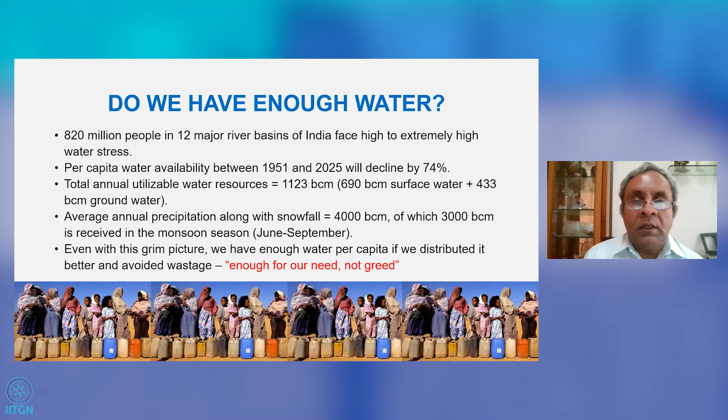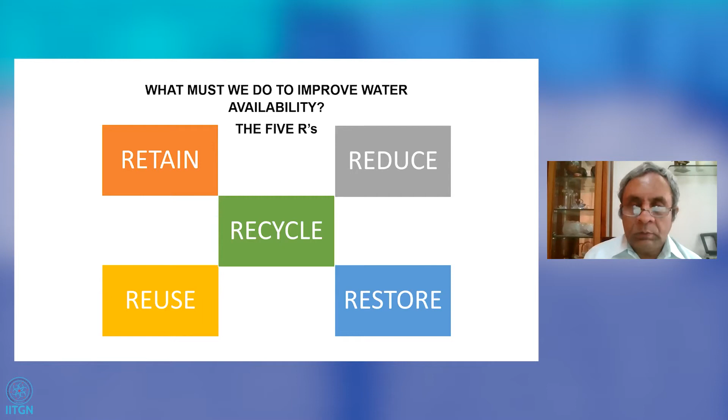What must we do to improve water availability? I look at it as the 5 R's: retain, reduce, restore, reuse, recycle. To start with, let's look at retain.

India has a very long history, 5,000 years of water management. The reservoir in Dholavira in Gujarat was set up between 3000 and 1800 BCE. This was one of the locations of the famous Indus Valley civilization, which stretched across much of West India and what is today Pakistan.

Sringaverapura near Allahabad was a location where Ganga floodwater harvesting was done 2,300 years ago. The Kallanai Grand Anicut on the Kaveri River, built by the Cholas 2,200 years ago, is still in use.

Over the last several decades, almost 100 years, we've built a large number of dams, reservoirs, and water storage systems, including Hirakud Dam on the Mahanadi, Nagarjuna Sagar Dam on the Krishna, Bhakra Nangal on the Sutlej, Tehri on the Bhagirathi, and Sardar Sarovar Dam on the Narmada.

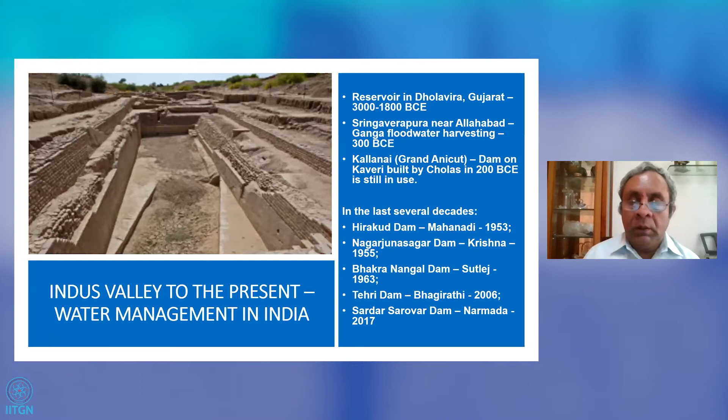But though we have been using these dams and impounding water in large reservoirs, we still face serious problems in going along this path. Why? Because dams are increasingly associated with displacement of local populations, deforestation, environmental degradation, and geological activity.

It's not popular anymore to be building dams. There's a lot of opposition, and it's unlikely that we will easily be able to convince the populations in those areas, particularly local and tribal populations, that it is necessary to do such violent damage to nature in order to build huge dams. In addition, river flows are also decreasing due to demand and climate change.

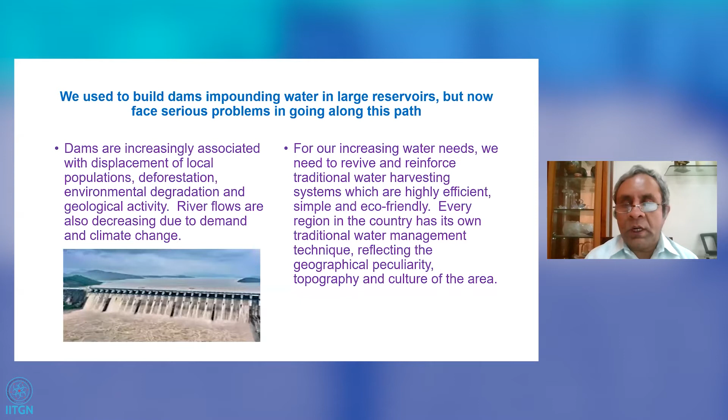So for our increasing water needs, we need to revive and reinforce traditional water harvesting systems, which are highly efficient, simple, and eco-friendly. It's interesting to note that every region in the country has its own traditional water management technique, reflecting the geographical peculiarity, topography, and culture of the area.

I'll run through some of these very quickly. The Kuhls are surface water channels in Himachal Pradesh. They carry water from the streams for irrigation.

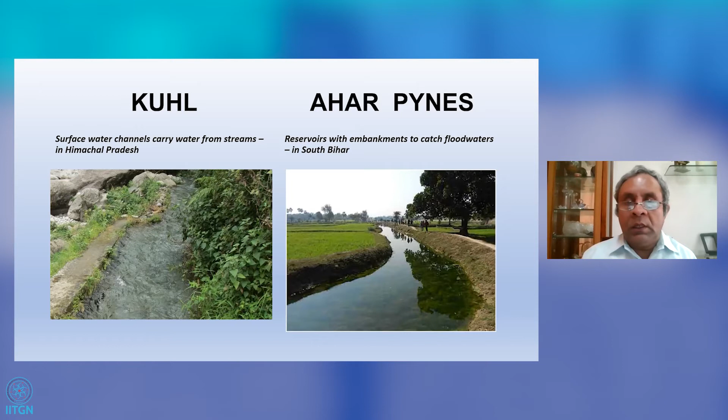Ahar pynes in South Bihar are reservoirs with embankments which catch the flow of flood water, used for paddy cultivation in Bihar.

The Khadins are earthen embankments built across hill slopes in Rajasthan. The Zabo of Nagaland are channels which carry rainwater from hilltops.

The interesting thing is that this rainwater is channeled through cattle yards, where it picks up manure and moves on to ponds on terraced hillsides, and from there to paddy fields. In these paddy fields, it's not only paddy which is grown, but fish is also being cultured. As a result, the manure helps feed the fish as well as grow the crop.

Check dams have been a very good way in which small interventions can manage to bring great results. They're called Johads in Rajasthan, Madaka in Karnataka, and Pemghara in Odisha.

The Johads in Alwar district have been remarkable, through the Tarun Bharat Sangh of Rajendra Singh, in bringing about tremendous change in raising groundwater levels and changing the whole water situation in Alwar district and neighboring districts.

The Bhandara in Maharashtra, in Nasik and Dhule districts, diverts water to the Phad, which is a community irrigation system on three rivers of the Tapi system. This again has been very beneficial to the cultivators in the area.

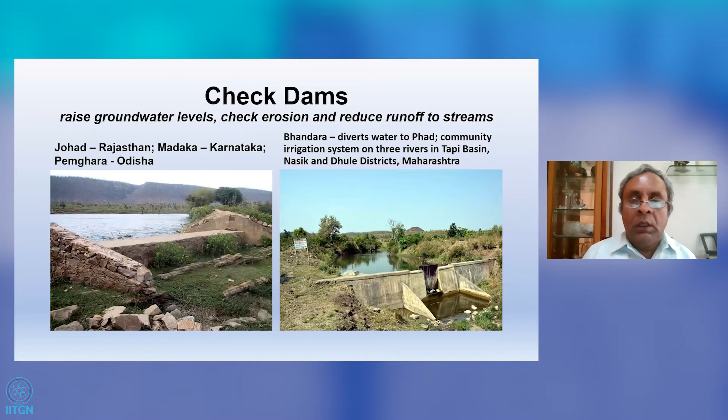Impounding water has always been an important factor in making sure we have enough for drinking water as well as agriculture. The pat and katta are bunds of stone and mud, seen in Madhya Pradesh and also in coastal areas. They hold water for irrigation and minimize the flow of fresh water to the sea.

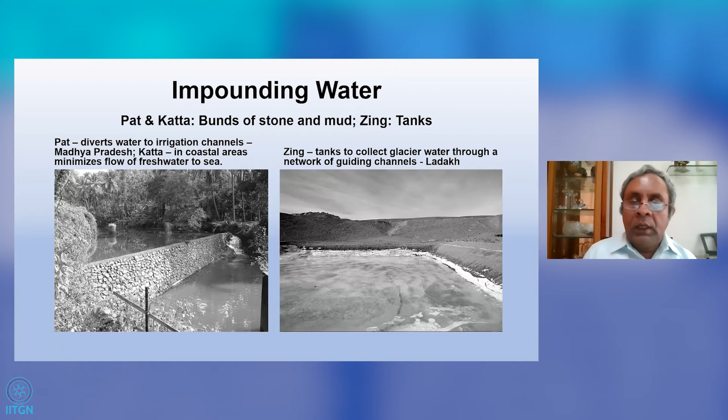Zings in Ladakh collect glacier water through a network of guiding channels, enabling farming to be done in an area which otherwise has very little water.

Tanks and percolation wells in Rajasthan are critical for drinking water. In particular, the Tanka is a system of rainwater harvesting through cylindrical pits in Rajasthan. The Par enables rainwater from catchments to percolate the sandy soil, and these kuis are used to get the water from below, which has sunk into the soil. The number of kuis can depend on the size of the Par.

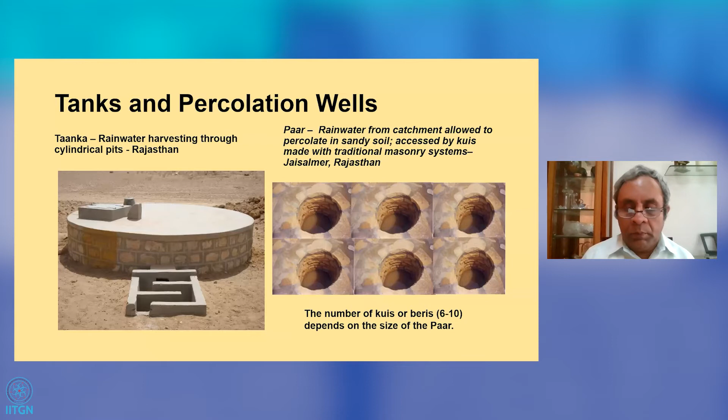We have water harvesting structures all across India: the big tanks, the Eri in Tamil Nadu, the Cheravu in Andhra Pradesh, the Dong in Assam. These are flood control systems. They also check soil erosion, prevent wastage of runoff, and recharge groundwater. In many cases, these tanks are interconnected, so they manage to move and distribute water from places of surfeit to places of deficit, ensuring distribution in addition to storage.

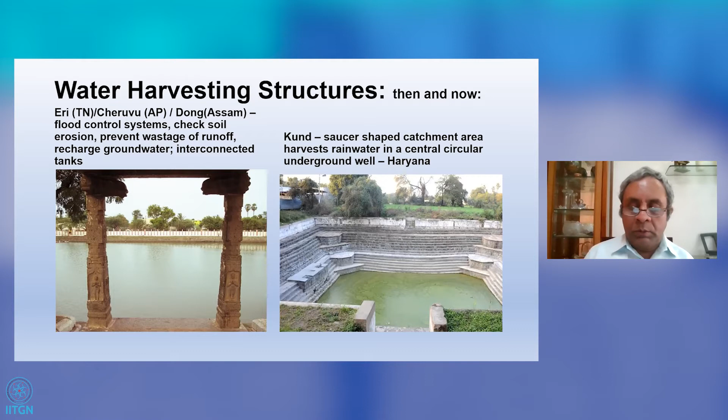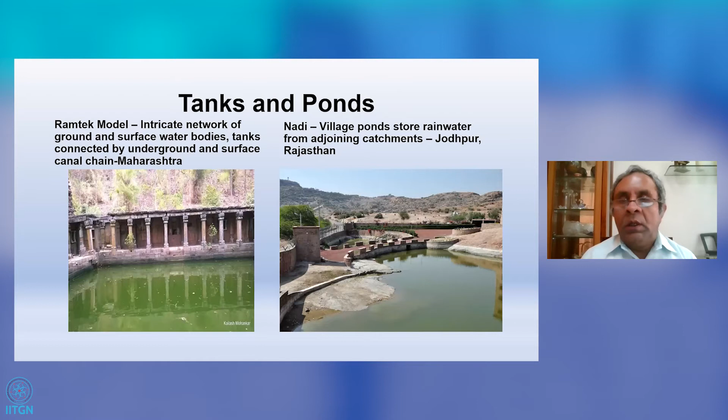The kunds in Haryana are saucer-shaped catchments which harvest water in a central circular underground well. Kunds are also found in other parts of North India, and they are extremely useful both for drinking water and irrigation purposes. Tanks and ponds across Maharashtra include the Ramtek model, an intricate network of ground and surface water bodies connected by underground and surface canal chains. The Nadi in Rajasthan, which also means river, refers to village ponds which store rainwater from adjoining catchments in Jodhpur.

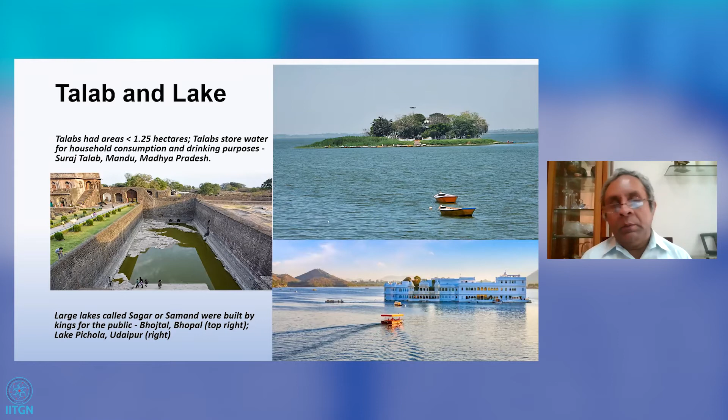Talab and lake, the designation of Talab, Sagar, Samand, lake, all depend on the acreage of the surface water body. The small one acreage is the Talab - you see here the Suraj Talab in Mandu, Madhya Pradesh. We also have the large lakes, the Sagar and Samand, built by kings for the public - the Bhojtal in Bhopal on the top right screen, and Lake Pichola in Udaipur on the right bottom.

A unique feature found in Gujarat, Rajasthan, even Karnataka are stepwells. These are tremendous improvisations for a time when we never had pumps or electricity systems to lift water easily. By tapering it and enabling people to go down to the water, they managed to ensure that the water table stayed at a position where it could be reached by people who could then carry the water up.

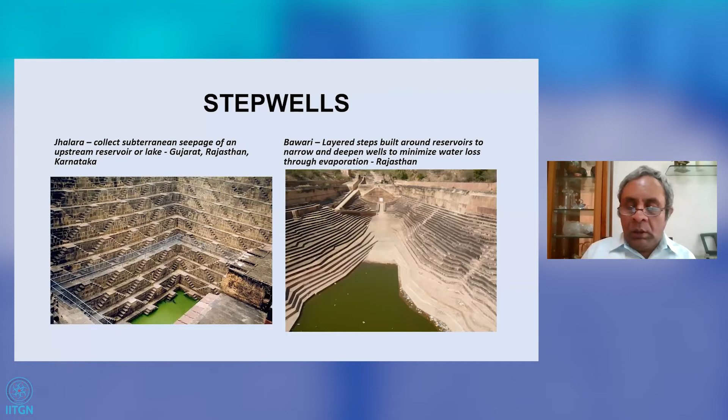The Bawari has a similar arrangement - the Jhalara in Rajasthan on the left, and the Bawari also in Rajasthan. The Bawaris were built very narrowly so that they could deepen the wells and minimize the water lost through evaporation. Other water storage structures, the Baolis, had beautiful arches, carved motifs, sometimes even rooms, and even stages for dance performances in Firozshah Kotla, New Delhi, in Gujarat, and in Rajasthan.

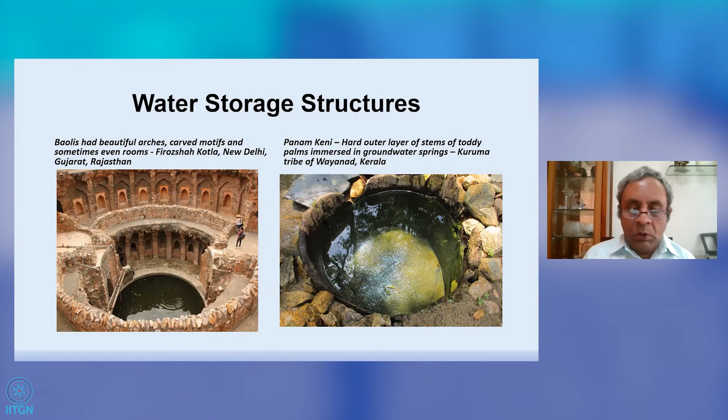The Panam Keni by the Wayanad tribe, Kuruma tribe in Wayanad, Kerala, used hard outer layers of stems of toddy palms, which were immersed in groundwater springs. These stored water, which was then used by the tribe.

Conserving water in Andaman and Nicobar Islands and Arunachal Pradesh: in the Andamans, the Shompen tribes used jack wells, pits encircled by bunds made of logs of hardwood, interconnected by split bamboo drains. In Arunachal Pradesh, more recently, ferrocement tanks have become a low-cost alternative to masonry, plastic, and RCC, and have come up in a big way. Both these places receive a lot of rainfall, so systems for capturing it have been very useful.

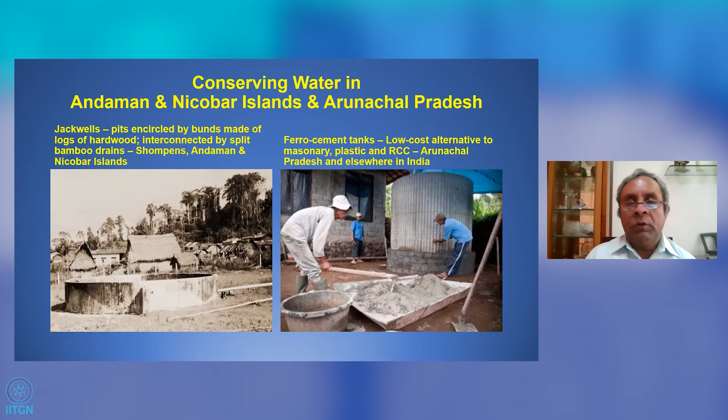As I mentioned earlier, around 2,100 liters of rainwater can be harvested from 1 inch of rain falling on a 1,000 square foot roof. But unfortunately, in India, only about 8% of our rainwater is actually harvested, which is very, very small. This is also something our Prime Minister has mentioned not too long ago.

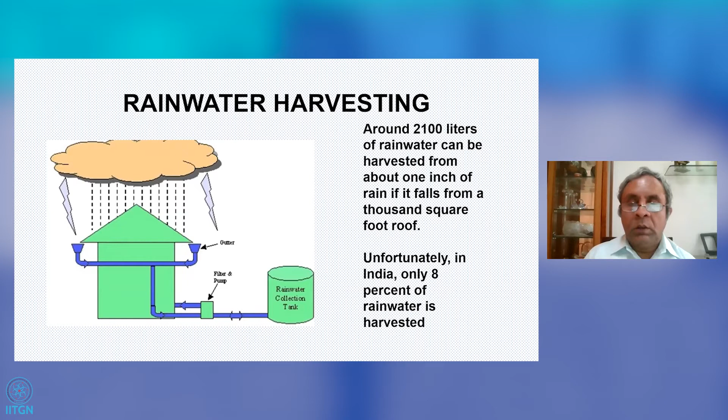Along with this, we also have recharge wells, which can add to the water supply in the groundwater table.

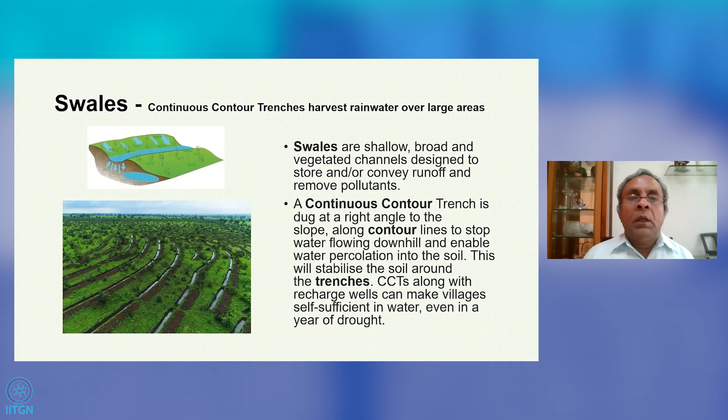The factor which is not really appreciated is the importance of groundwater to India. It is the main drinking water source for our people, because most of our surface streams are polluted and contaminated. So it is groundwater which becomes the mainstay of our drinking water. 80% of our groundwater is still used for irrigation and about 8% for drinking.

There is tremendous overexploitation of our groundwater, with over 20 million wells having been dug all over India. 67% of our irrigation is groundwater based. It is shocking that we are the biggest extractors of groundwater in the world, more than China and the USA combined. And India's irrigation efficiency is very low - 60% of all our water used for irrigation is lost.

Industry needs to shift from groundwater. At the moment, industry is exploiting groundwater in a big way. Industry needs to shift from groundwater use to surface sources, and especially to the reuse of treated wastewater, which I will come to later in my presentation. And as I said from the earlier slide, continuous contour trenches, recharge wells, and soak pits can help to supplement groundwater.

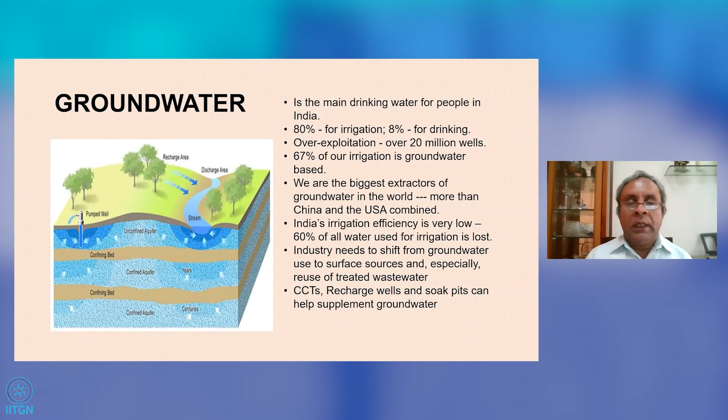Afforestation - we have all given lip service to afforestation, and we don't realize how important it is in retaining runoff flows, reducing soil erosion, raising groundwater levels, mitigating flood damage, preserving biodiversity, increasing flora and fauna, regulating the microclimate, and also providing food and timber.

I wonder if we can encourage every school child to plant 4 trees a year and see how that can make a change, because we need to plant millions of trees if we are to ensure that our forest cover does not go down, and if we are to preserve a good and healthy climate. Reduce.

We need to be very conscious of the degree of waste we do to water, both water used in agriculture and water used in households, and also water used in industry.

For agriculture, sprinkler and drip irrigation enables fertigation to be applied directly to the roots. This reduces water use by about 40%. We must avoid flood irrigation. I know that for 10,000 years, people have been growing rice with flood irrigation, but that does not mean that this is the best or most optimum way of doing things.

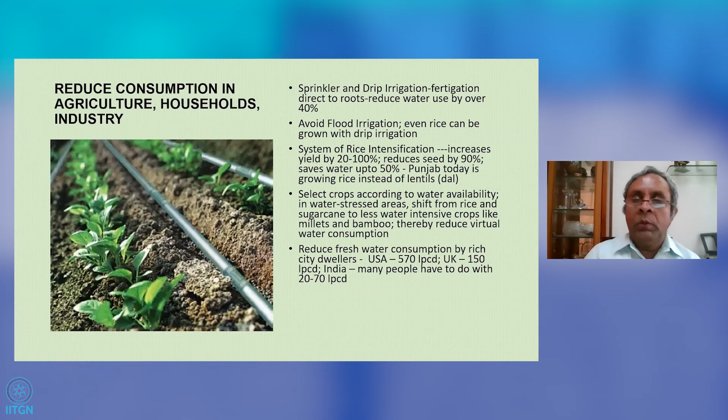In the USA, which is the most wasteful nation in terms of water consumption, you have 570 liters per capita per day. The UK is 150. India recommends between 100 and 150, but 70 is also a figure popularly used in India, 55 to 70. But we really need to ensure that wherever water we have, we manage to conserve it and use it well.

What are the innovative technologies we have to reduce water use? Over 60% of municipal water is lost daily in cities and towns due to leaks, open or broken taps, theft, and neglect. Technologies like distant meter reading already exist, some from countries like Israel, but also available now across the world and in India. Distant meter reading technology will enable us to know water usage without having to physically go and check.

Sensors can monitor quality and quantity. The use of big data checks water flow to a given neighborhood, conditions when a pipe is likely to burst, temperature, and thousands of other inputs to develop a profile to detect anomalies that are often predictive of a leak. And then, of course, robotic cameras check the inside of sewer pipes to detect leaks in advance.

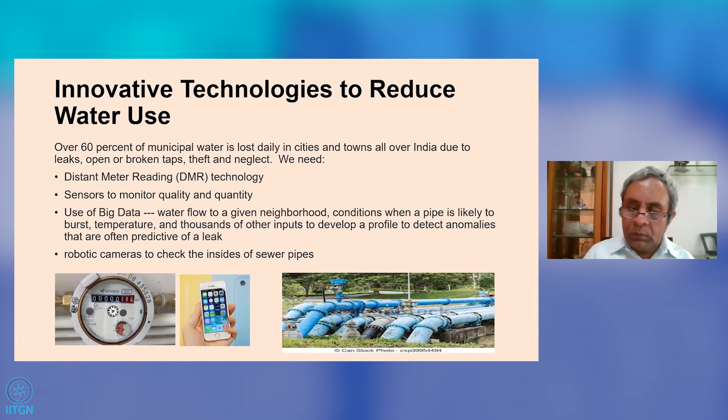I've given here a picture of a typical water treatment plant. Unfortunately, we have very, very few of these in India. This is a basic water treatment plant where you do sedimentation, filtration, and disinfection.

I wish to throw this question to the listeners: when can we drink water straight from our taps again? I used to do this till 1982 in Delhi, but today I don't think I would do it in any place in India.

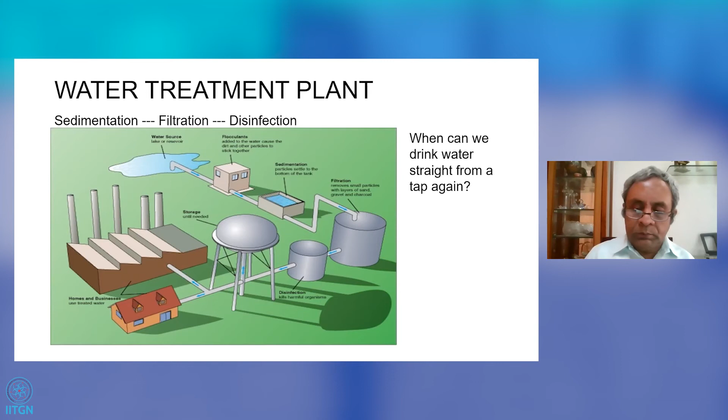It's sad, really sad, that we have ruined our water supplies to such an extent that for every drop of water, we need to depend on a filter, an Aquaguard, or whatever it is to be able to get water to drink. We need more water treatment plants, which is something that is really in shortage.

Parts of India have arsenic poison in water, heavy metals, fluorides in water. So we need to have technologies in place. These are not expensive technologies, they already exist, and it is the responsibility of any municipality to ensure that these are removed.

Upstream wastewater becomes downstream drinking water source. I wish people would remember this when they throw their waste without processing into the rivers. India is ranked 120 out of 122 in water quality, which is not something we can look at with pride.

We need to use IT to monitor water quality at the panchayat, tehsil, and district levels. This is all very possible today with information technology, with core dashboards, with the capacity for a district collector to monitor everything that goes on in his district in terms of water.

Atlantium and SODIS. Atlantium is basically this tube you see on top of the presentation. The tube has ultraviolet light in it, and when water passes through, disinfection takes place. SODIS does a similar thing, but it's the Indian jugaad system where a clear bottle is used with sunlight, UV from sunlight, for disinfection.

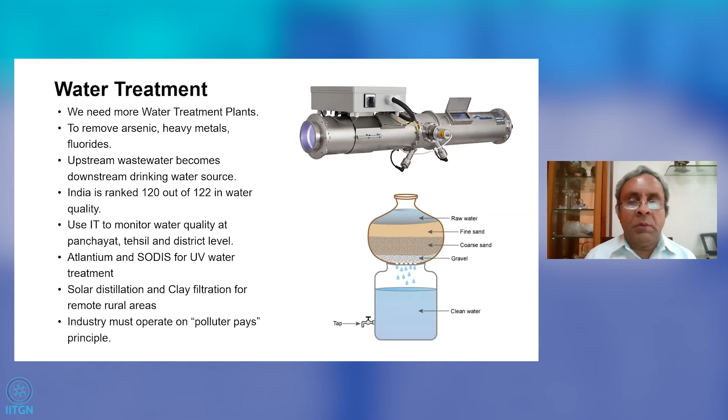Over and above everything, industry must operate on a polluter pays principle. Industry cannot get away. We see that there is change. For example, in Kanpur, the tanneries have been brought to book, and a lot of them have changed. They are now recovering the chromium and other heavy metals that they were earlier throwing into the water. But all industry must operate on a polluter pays principle if we are to ensure there is water for all.

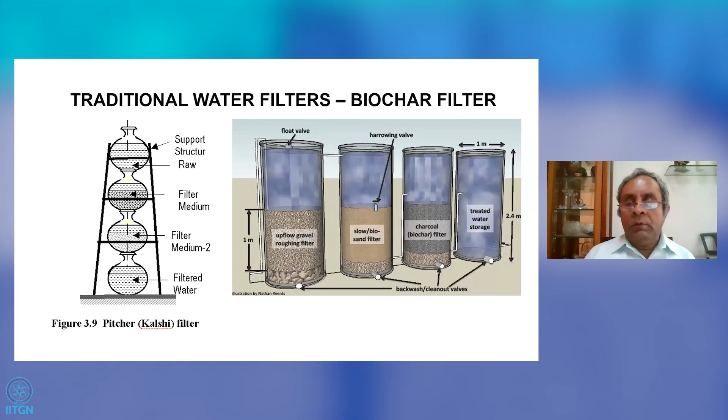I've shown here a picture of traditional water filters, biochar. Biochar is an excellent water filter, and using charcoal, that is biochar, biosand, and sand and gravel, you can make excellent filters which can do most of the filtration, even in areas which do not have much affluence. Reuse.

This is a shocking thing which I discovered: India has 816 sewage treatment plants, of which only 522 are functional. The USA has 14,748. So it's a huge difference. We must remember that the US is 1/4 the population of India and 3 times the size, so we are 12 times denser than they are. Yet this is the situation where we have so few sewage treatment plants and they have so many: 14,700 versus 522.

Ideally, we should have 1 sewage treatment plant for every 100,000 population. And I've just given here for information a typical sewage treatment plant.

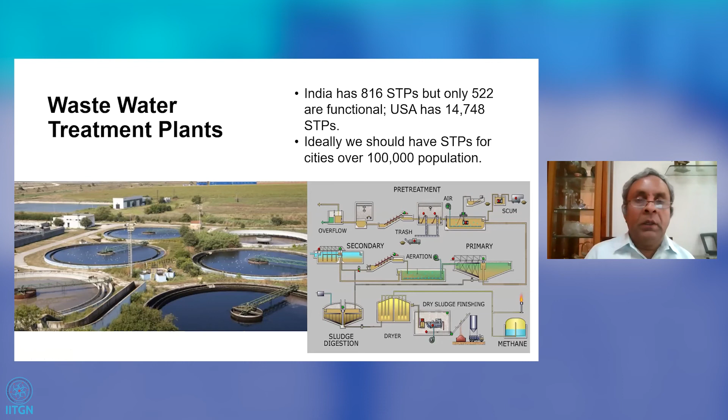We must reuse wastewater. It's a huge resource which we're just throwing away. India generates 62,000 million liters per day of sewage. Only 30% of that is treated. 43,167 million liters per day of untreated sewage is directly thrown into our rivers, water bodies, or the sea. This is an untapped resource. We don't realize that sewage is not waste—it is a resource which can yield valuable fertilizer and energy, power from methane gas.

Water for irrigation and industries, including power generation, could be met from treated wastewater. Treating wastewater to freshwater quality is half the cost of desalination systems and does not have the issues of brine damaging marine ecosystems. And many countries are already reusing treated wastewater.

Israel is an example of one which uses 94% of its wastewater. Australia and Singapore use almost all its wastewater. The US also does, though to a much lesser extent.

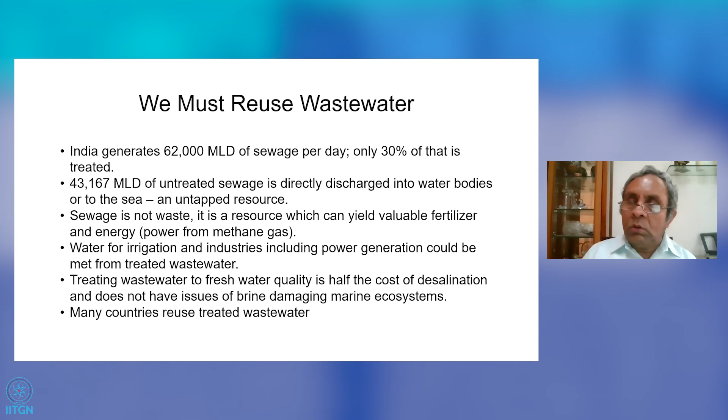I have not understood why even plants in Bombay, close to where I live, where there is a sewage treatment plant, release the treated water back into the sea without doing anything about it. And when I asked them, they said that farmers don't want sewage water for farming. This is ridiculous because the NPK resource in sewage would be hugely advantageous to crops once the pathogens are removed. But we need to educate people.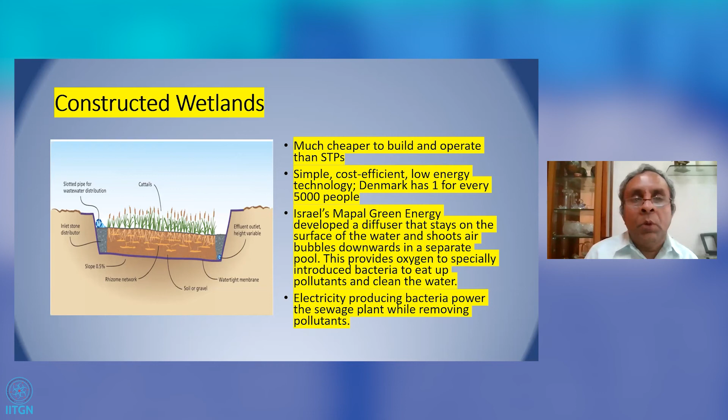Israel's Mapal uses a system where they have a diffuser which shoots air bubbles downwards and provides oxygen to enable bacteria to eat up pollutants and clean the water. That bacteria is actually producing electricity, and that is used to power the sewage plant. These are the kinds of innovations which we need to get and put into our systems here in India.

Recycle, this is the 5th of my things. I think timing-wise, I'm okay, isn't it? I think so.

We come to desalination. 97.2% of all the water on our planet is seawater, saline. India is in a particularly lovely position because we have 300 days of sunshine and high ambient temperature. We have 7,500 kilometers of coastline. So we have a tremendous opportunity for putting in smaller solar thermal desalination and distillation units, which could provide water, especially in coastal areas.

As I said earlier, desalination should be the last option. When you have finished all the earlier 4 which I mentioned, if you still don't have water, then you come to desalination. But it can happen and does happen that you may still require to put this in place.

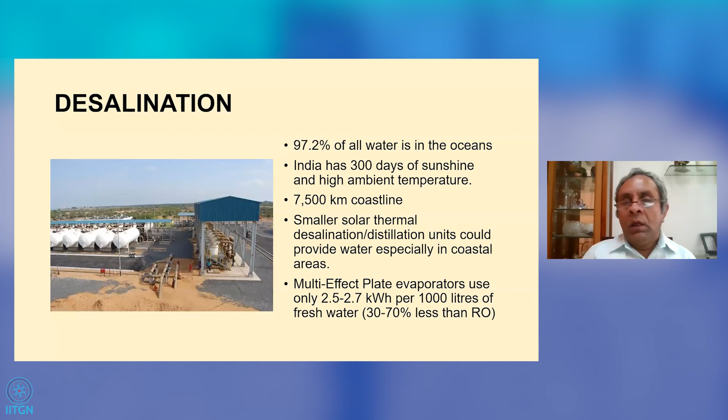Multi-effect plate evaporators, incidentally, these are also used on ships. They use only 2.5 to 2.7 kilowatt hours per 1,000 liters of fresh water, which is 30 to 70% less than reverse osmosis. And these kind of units could be game changers in terms of bringing in solar desalination systems in India.

I've just highlighted briefly the desalination technologies available to us. Reverse osmosis is most widely used, but we must remember that it is capital intensive, energy intensive, and though costs have been reduced significantly with better membranes, it still requires pre-screening, pre-treatment to prevent biofouling.

The brine effluent, what you push out of the system, is equal to the amount of fresh water that you're putting in. In other words, if you are putting in 200 million liters a day, you are pushing out 100 million liters a day, and you get 100 million liters of fresh water, 100 million liters of brine water.

So it is an extremely inefficient system in that sense, especially because at the moment, the system used in Chennai and most other places is of directly leading a pipe into the sea and disposing of the brine. This causes grave harm to marine ecology.

The alternative is to go in for thermal desalination using multiple effect distillation, thermal vapor compression, and multi-effect plate evaporators. These are less capital intensive, they use less energy per volume of water, and are very attractive where waste heat from industry or solar energy is available. They're more eco-friendly, as you can manage to extract much of the water. So it's not as if you're doing 50-50 like in RO.

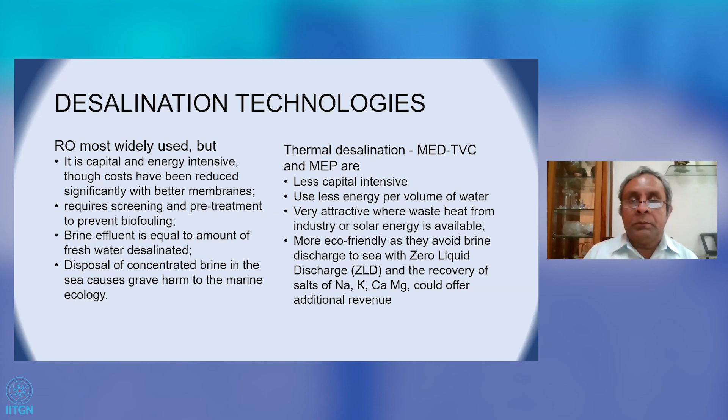When nothing else is available and all else fails, as they say, turn to the air. There is more water in the atmosphere than in all rivers on earth. And this water is clean, it is TDS and bacteria-free water. And so it is tremendous. The only problem with it is also one of the most expensive waters, but the expense can be brought down significantly if you use solar systems for harvesting the water.

EcoloBlue is a company in Abu Dhabi, which has an air water generator, which condenses about 400,000 liters per day in desert-like conditions. If EcoloBlue were used in Mumbai or Chennai, it would do almost 50% more, if not more, than what it is doing in Abu Dhabi, because of the relative humidity in the atmosphere.

WaterMaker India has successfully installed air water generators in Andhra Pradesh. Meghdoot is a Maithri Aquatech plus CSIR, Indian Institute of Chemical Technology tie-up, which proposes to install air water generators in defense installations, hospitals, railway stations across India. They are also proposing, or have already exported, to South Africa and some other countries.

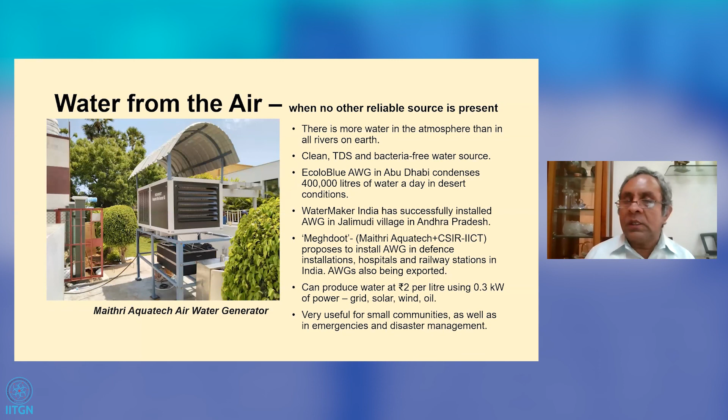We can, and I have checked this out with mathematical working, produce water at 2 rupees per liter using 0.3 kilowatt of power. This is what Meghdoot advertises. Grid, solar, wind, and oil - you have all the options for what type of power you want to use. The additional interesting thing about this, because these are small compact units which you can move around, they are very useful for small communities and in emergencies and disaster management systems.

So I come to the end of the conclusions that I want to show you in this talk.

The steps to be taken include: retain water by reviving traditional water systems across India; undertake extensive afforestation, because this itself will hold water - it will be doing the work that you want, especially in Abadi and wastelands. There are millions of hectares of Abadi and wastelands in different parts of India. It is a huge amount of land available, which potentially could be afforested, not just for water harvesting, but also to produce the benefits of forest produce.

We need to make water a central subject. We need to enforce regulations for groundwater extraction and for surface water use. And though I know this will be politically very unpopular, we need to pay for the use of water for irrigation - no free water. There is no such thing as a free bill for water.

Reduce water use through the use of drip irrigation, more efficient irrigation systems, initiatives like system of rice intensification, less water intensive crops, reducing leakage and wastage, and the metering of water.